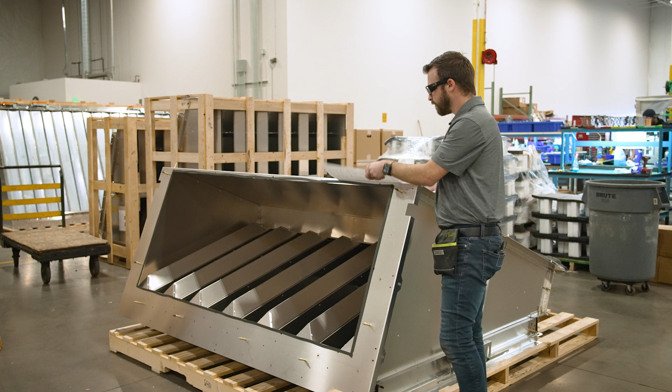With the channel blender, there will be a box of hardware, and in this box of hardware is a pair of cleco pliers, which are used to remove the temporary fasteners used for shipping. The cleco pliers and the clecos must be returned to Blender Products with the prepaid shipping label upon completion of the assembly. Additionally, there will be a build direction diagram and a list of the hardware that's packaged inside your hardware box.

The first step to assembling this channel blender, we need to remove the top template by removing the clecos around the channel blender and carry this template into the air handling unit and install it on the ceiling. Now that you have your top template into the air handling unit, we're going to lift it and screw it into the ceiling of your mixing box. We're going to only screw through the slotted holes.

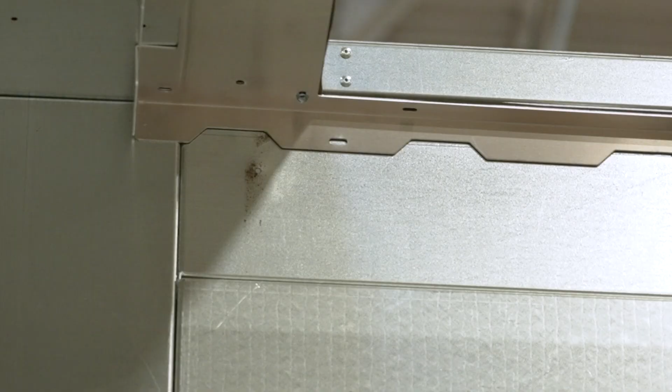Before you start screwing, you want to make sure that your opening is centered with the opening on your mixing box. Make sure that the pre-installed gasket tape is compressed between the air handling unit ceiling and the install template. So on the templates, the slotted holes are the only ones we're screwing in at this time. There are circular holes. We do not want to install screws in those holes at this time.

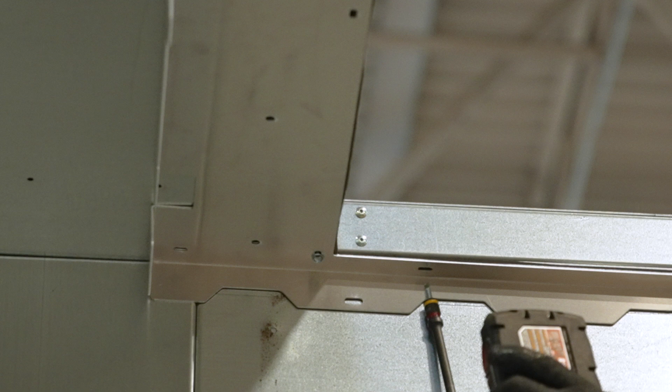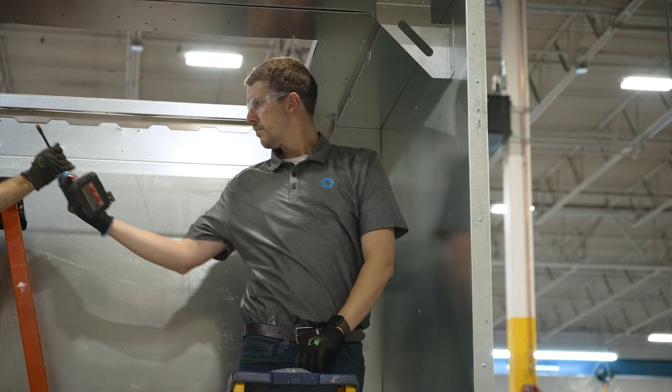Now that we have the top template installed, we're going to take the top back template and remove the cleco fasteners and install it in the air handling unit. If it is difficult to remove any parts on this pallet, double check that all clecos have been removed. When you lift this one up, you want to make sure that the alignment patterns align. And again, we're only going to screw in through the slotted holes.

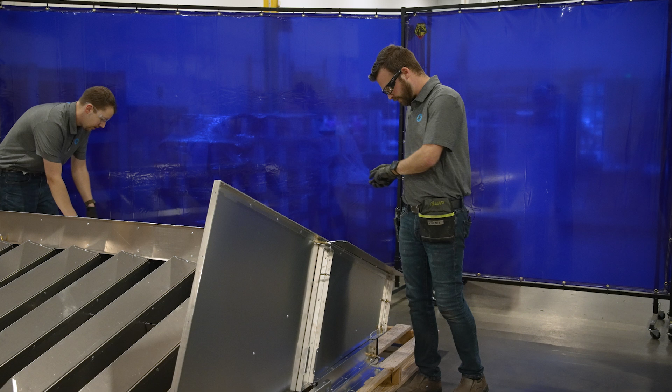Finally, the back bottom template will be removed from the channel blender. Again, we're going to align the alignment grids of these two panels before screwing the template in, and we're going to screw through only the slotted holes.

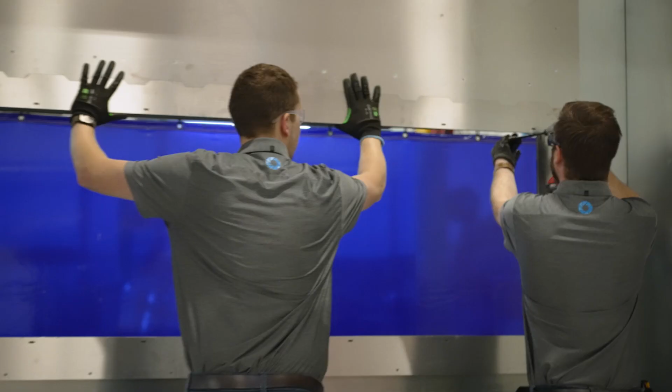Now that we have the templates up, we want to go through and make sure that all the slotted holes have screws in every piece of the template. If your template doesn't fit in your mixing box, please stop, because the channel blender cannot be assembled if the template doesn't fit.

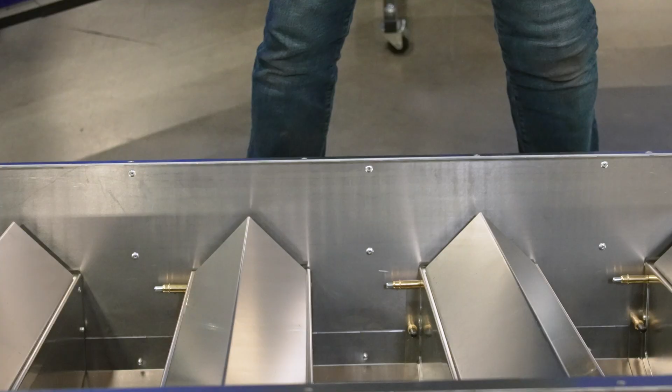So now we're going to remove this bottom cap and bring it into the air handling unit for installation. In order to remove it from the channel blender, there are temporary fasteners pointing along the channel walls into this bottom cap and a couple on the sides. Those will all need to be removed.

Before we can install this bottom cap to the air handling unit, we need to silicone this back flange. Every component that gets attached directly to the template will have silicone on the flange to make an airtight seal. Now we'll take this bottom panel and we'll align it with the holes at the bottom of the template and screw it in.

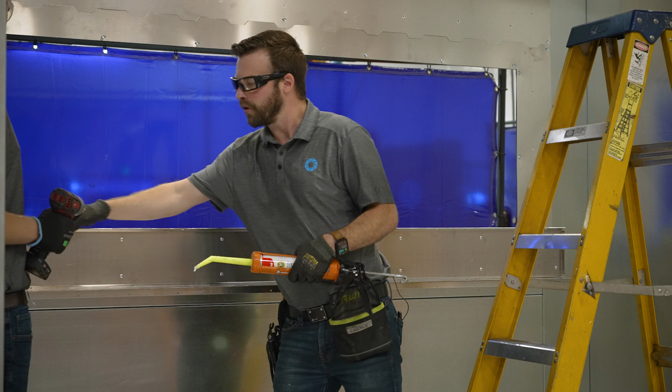So now we'll take the channel divider, remove the clecos securing the channel divider to the channel blender, and install it to the air handling unit just like that bottom cap. So before we can install this channel divider to the wall, again, we're going to need to silicone this flange, and it's key to point out that there are two flanges. The flange with the sealing tape points away from the wall.

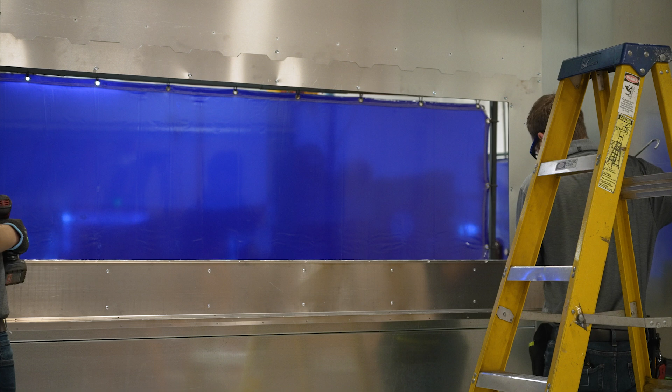Now we'll remove this top cap and install it on the air handling unit. Now we're going to install this top cap to the ceiling of the mixing box. But first we need to apply a bead of silicone along this front edge. When you lift this up here, this flange will be pointing down. And we're going to line the square holes with the holes on the template and screw only through the square holes.

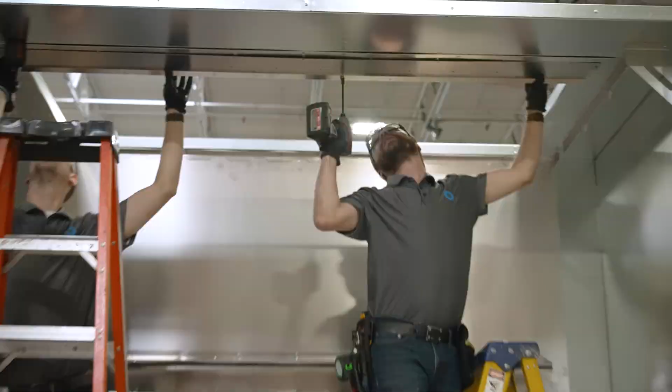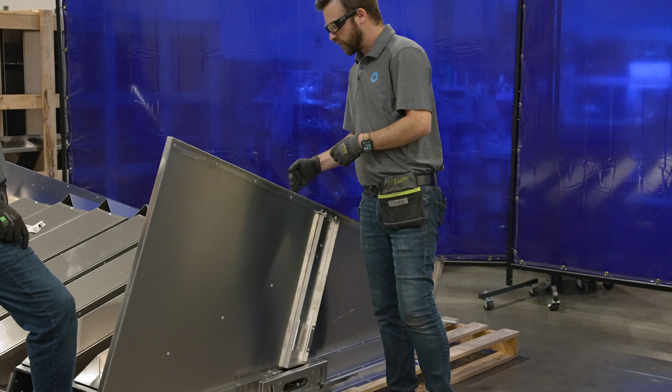The channel blender was pre-assembled with an assembly direction in mind. So when you start to assemble the channel blender inside your mixing box, you'll work your way away from the door, and as assembly progresses, you'll work your way towards the access door. The first channel wall has a lead-in riveted to the end wall. Additionally, each channel is numbered sequentially, 1, 2, 3, and so on.

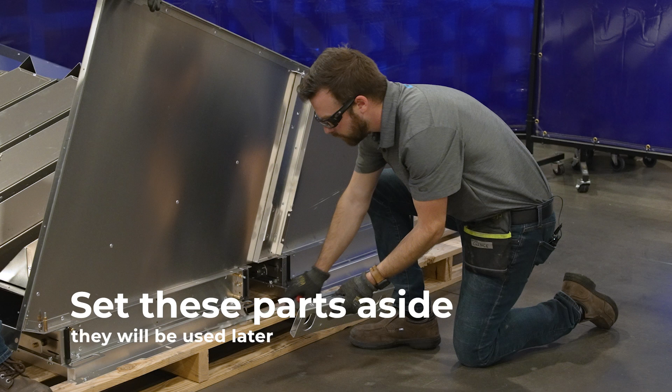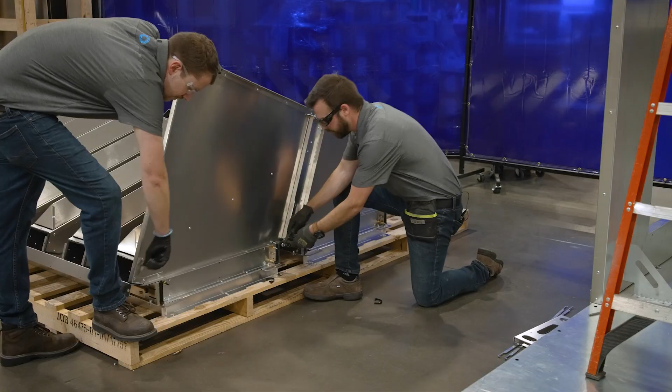First, we're going to want to take these brackets off and set them aside. And remove the clecos from this damper frame piece and the side pieces, and lift this end wall up. Before you install your first end wall, marked number 1, to the mixing box, we need to silicone this flange, and this bottom plate right here. Additionally, we'll silicone this channel divider flange right here.

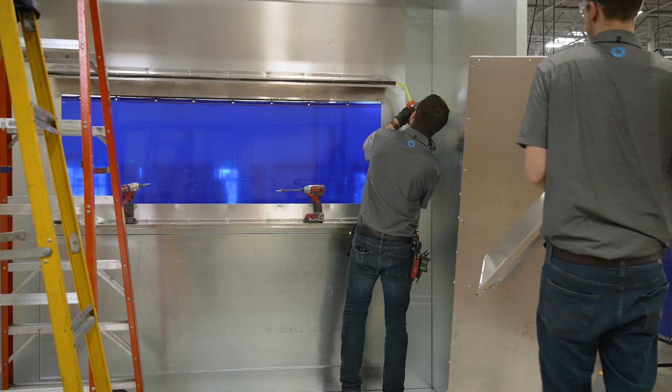We'll take this end wall and we'll lift it up, aligning the holes, and start screwing it in. It's recommended to screw in the top corner first and then work your way out on those flanges.

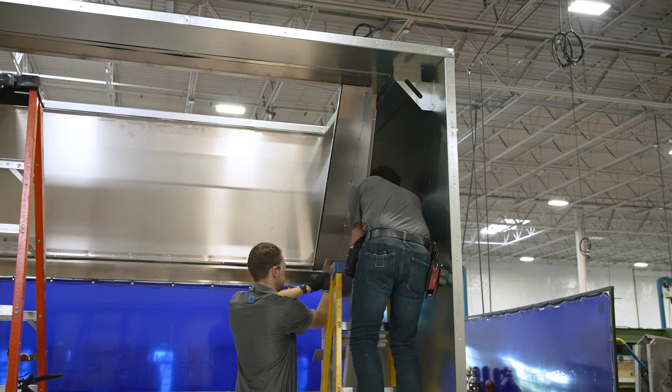So now we're gonna rivet this channel divider to the end wall. On this back flange here, there's a few rivets that need to be hit this way. They can be difficult to see, but because we have light shining in here, we can line them up. If you're having difficulty hitting those rivets from the side of the channel divider, you can also grab a ladder and shoot them from the inside out.

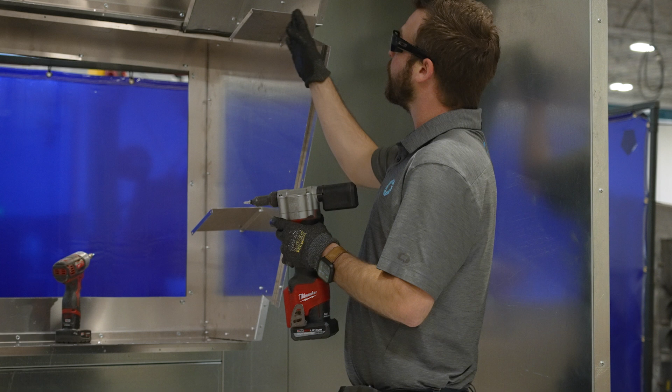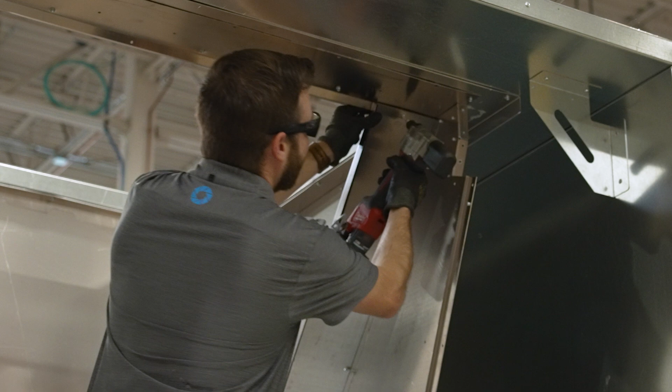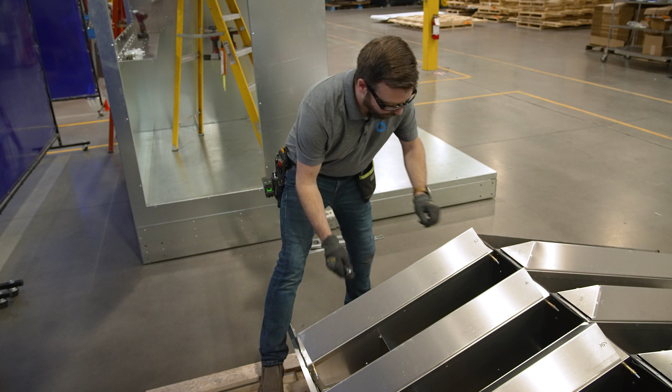So as we're walking through installing these channel walls, be careful of all these sharp corners because they can cut you. It's sheet metal. We're going to want to rivet on this one, this lead-in to the channel divider. And we'll need to rivet the lead-in right here. So now, for the following channel walls, we'll need to remove clecos from the ends of the lead-ins, and then we can lift the channel walls up.

Before you put your channel walls on, you want to inspect the tape around the seams. This tape is not placed properly. Sometimes that happens during shipping. You can peel it and re-stick it so it covers the split channel wall. If the tape is damaged or missing, we do supply a roll of black foam tape in your hardware kit that you can replace the tape with. The tape is on the top and the bottom of the channel walls.

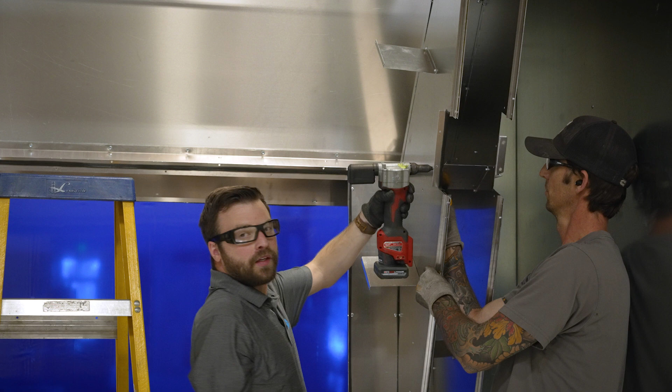So now we can install the channel wall in the lead-in assembly. So we're gonna lift it up into place. We're gonna rock it in. And this part's pretty crucial: the channel wall here needs to sit firmly up against the sealing tape on this back lead-in before you start riveting it. We'll also hit your turning vanes. Make sure they're lined up. Sometimes you need to look over to ensure that the rivet is through the channel wall and through the turning vane.

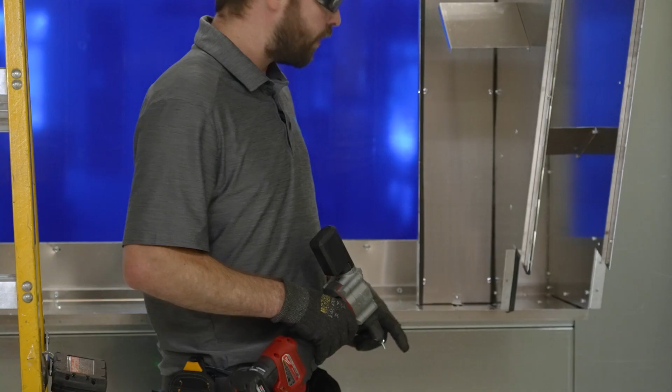We will need to use a Tek screw to screw in this flange to this top panel. The hole in this flange should align with the hole on the top panel and the template. We also need to rivet this bottom flange and this back tab to the bottom cap.

So now we're just going to continue taking the channel walls off of the shipping assembly in sequential order, 2, 3, 4, 5, and down the line until you're completed. And just rinse and repeat. Rock the panel up there, hit your rivets. Be sure to get your lead-ins, your turning vanes, the brackets on the bottom and the top.

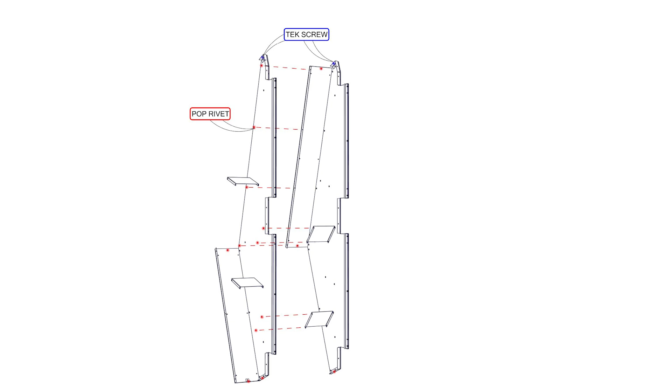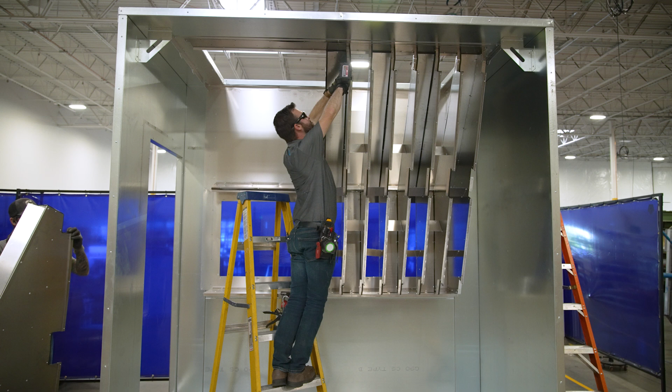It is crucial that every rivet is installed before moving onto the next channel wall because the space between the channels is too close together to be able to install rivets after the fact. If any rivets are missed, you can try to use a hand rivet tool to install the missing rivets, or you can work backwards, removing the obstructing channel walls until you have access to install the missing rivets.

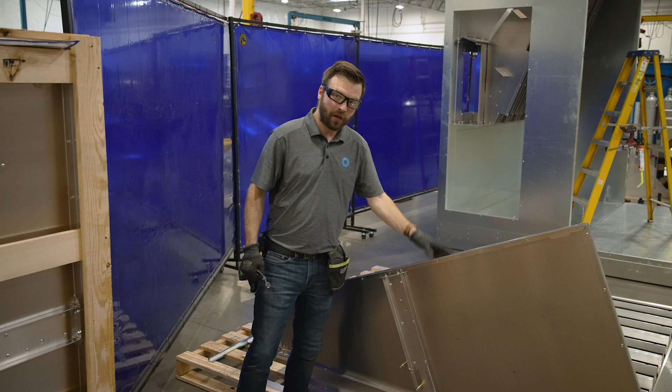To get the last channel wall off, you'll need to remove clecos from the end plate. And if there's any on the damper frame, there as well. Now you can remove the end wall, and now you have access to your last channel wall for assembly inside the mixing box.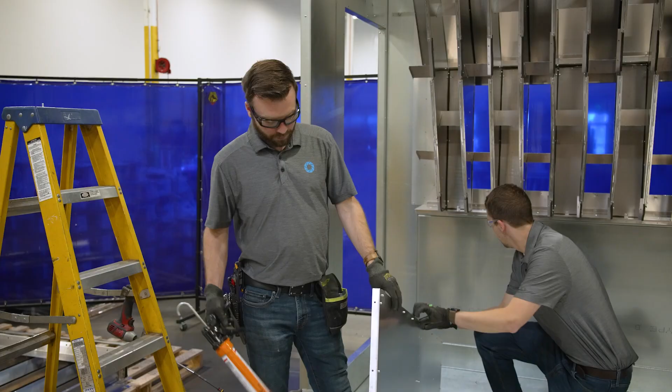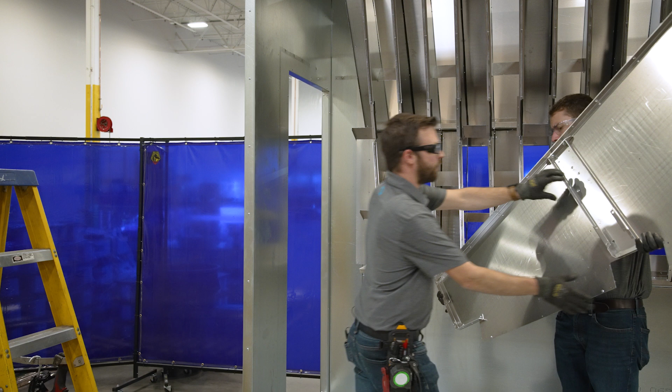For the end wall here, we're going to want to silicone the top and back flanges. We also want to silicone this flange right here where that end wall is going to mate up. Then we can lift the end wall up to the channel divider. We're also going to want to silicone the channel divider back here as well. Now we can lift it up into place, and we can rivet the turning vanes and the lead-ins.

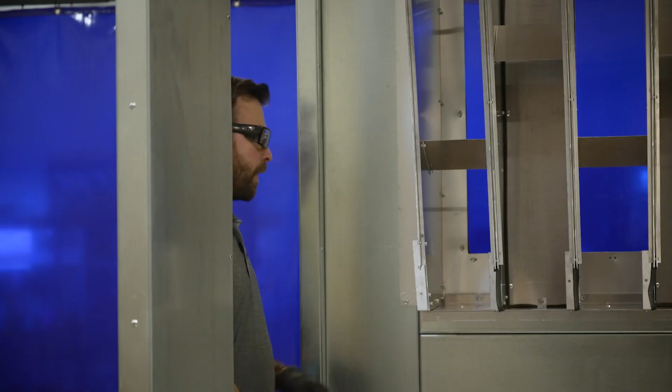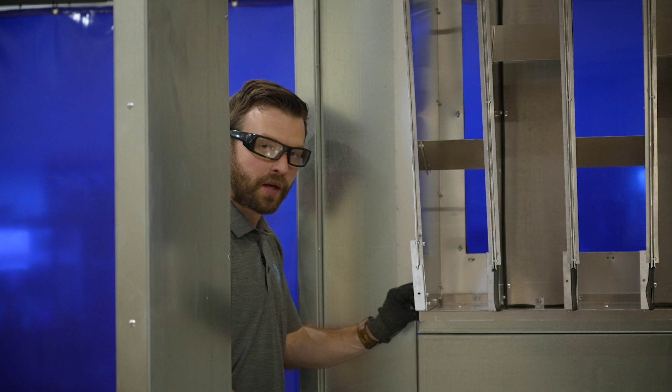Now that we have the channel walls assembly built and both end plates on, we're going to want to rivet the two holes in the back of this bottom flange on both sides. So now we're going to use Tek screws to screw this flange on the back and top into the air handling unit. Just as we did with the first side, it's best to start in the top corner and work your way out.

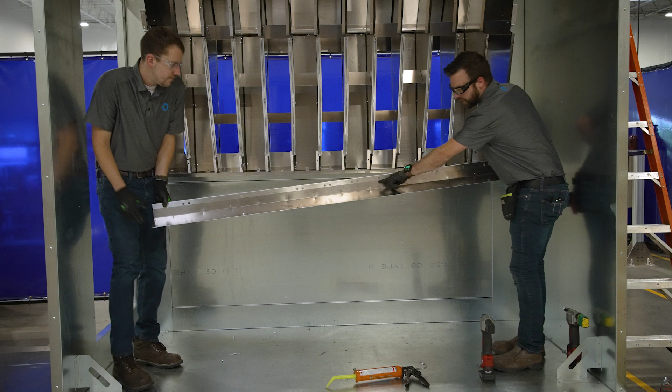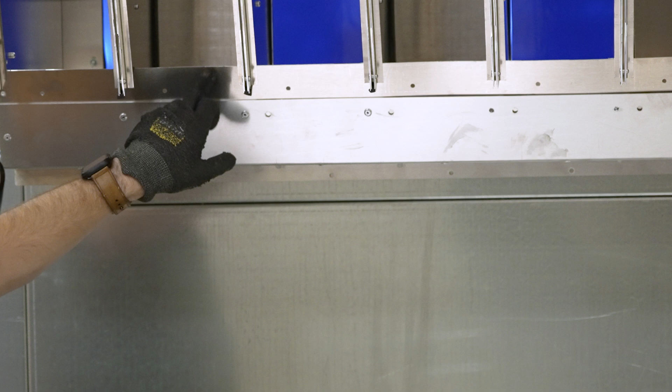So now we'll take the front piece of the bottom cap into the AHU, and we want to be sure to silicone along this seam right here where the two pieces of metal connect. When you're riveting this front cap on, you want to hit the holes that are right in this 080 piece of metal right here along the way, as well as the holes in this back flange right here. Do not hit the holes closest to the channel divider where the dampers will go. So now that you have all the rivets on this bottom flange in the front hit, you can hit this last rivet that's right here.

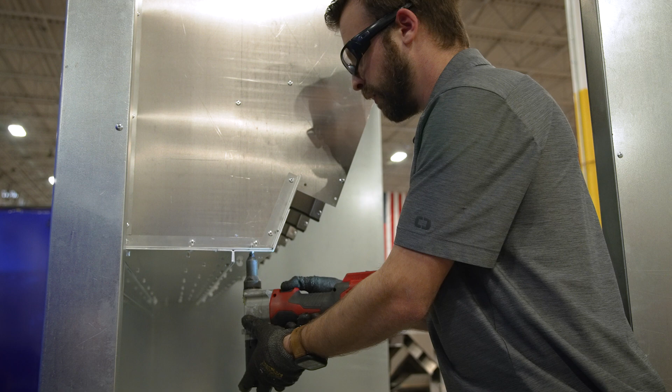On a double bank unit, we need to install this gray gasket tape on these two edges here on every single channel wall. We don't install it during shipping because it's likely to get damaged. So at this time, inspect all the sealing tape on this front face as well. If some of it's damaged, you can either replace it with the gasket tape provided or just peel it and re-stick it.

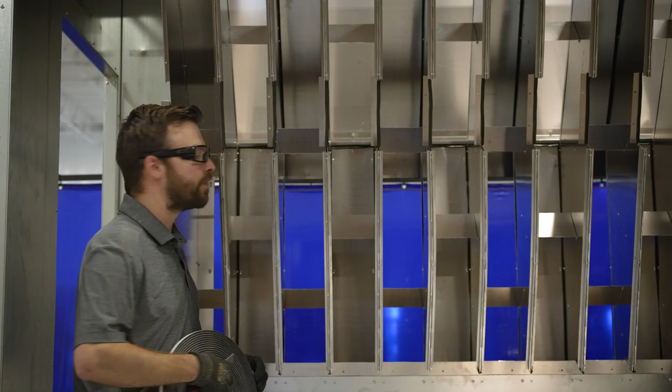So now we'll put the middle plate up here in between the two damper banks. This part is not symmetrical, so if you go to line it up, you want to line it up with these holes and these holes here. If they don't quite line up, you can flip the thing 180 and it will fit just fine. What we want to do is we want to silicone this flange and that flange over there. And when we install this into here, it goes on the inside of the end plates.

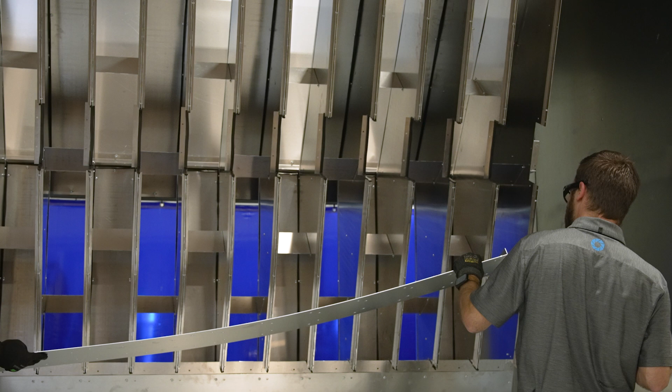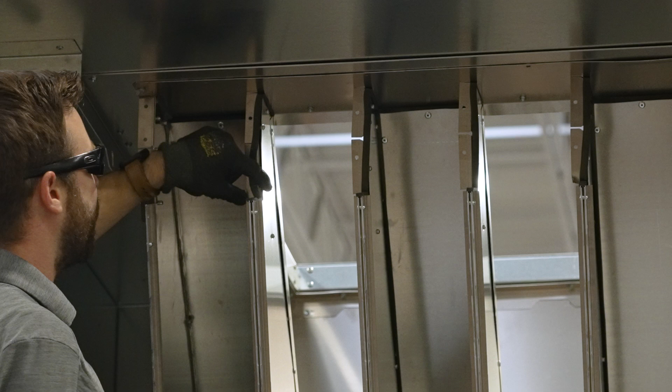To connect the middle plate to the side, there's two rivets right here in the center of this. Before we put this top panel on, we want to go through and inspect all the tape. So as you can see, this piece of tape right here is not covering the channel wall split. So what we need to do is we need to try and peel it off. And if you can't peel it off, we can scrape it off and apply a new piece of tape right here.

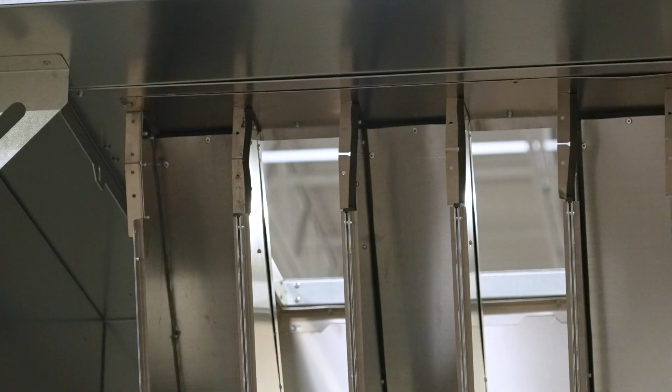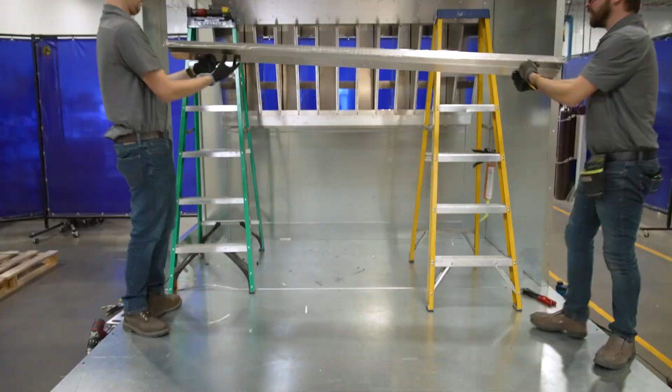So now to install this front piece of the top cap, we need to silicone the two ends and this top flange. There are a couple larger holes on the two ends, and those two holes are clearance holes that will pop over the Tek screws that we installed with the template.

So as we're going through and riveting this together, we want to hit this line of holes. We will Tek screw this top flange into the mixing box. We'll also hit this line of holes here, the first one over this bend. We do not want to hit any of the holes closest to where the damper frame is going to go, including the one on the very end.

We need to add silicone where the damper frame is going to contact the plate on the top, in the middle, before we install the damper frame. So that's probably about ½ an inch away from this edge is where we want to apply our bead of silicone all the way down.

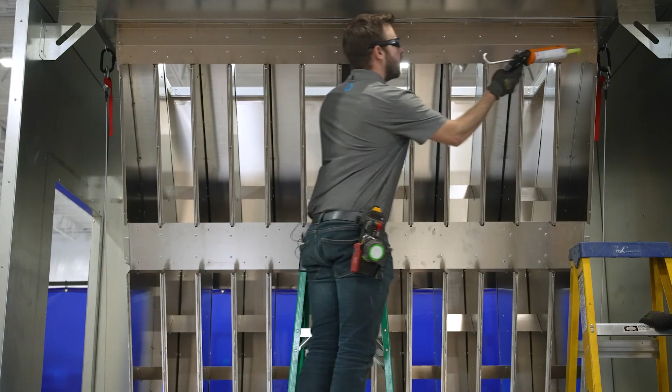So now we'll take the damper frame off of the shipping pallet. In order to do so, there's a drive screw right here, and on both sides there'll be a couple. We need to remove those. This bracket on the bottom that goes along the perimeter of this does get removed. Those are just for shipping. Those can be discarded once you're done.

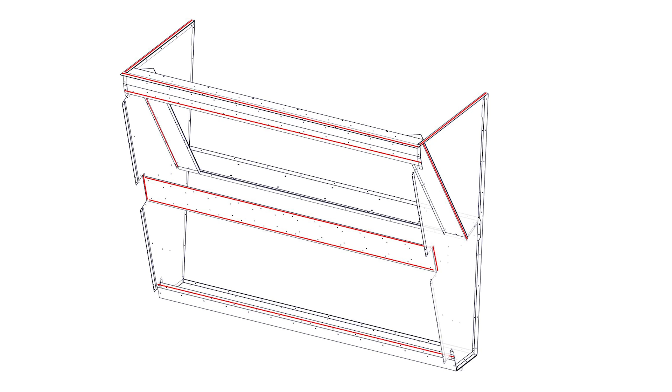So now that we're going to install the bottom damper frame, again, we have the silicone along this slant right here, and same right here. We want to keep the silicone about ½ an inch away from this edge. We're going to bring in this damper frame. The help of a third person may be beneficial at this point. You want to kind of slide it in there, making sure to align the channels with the split and the finger seal.

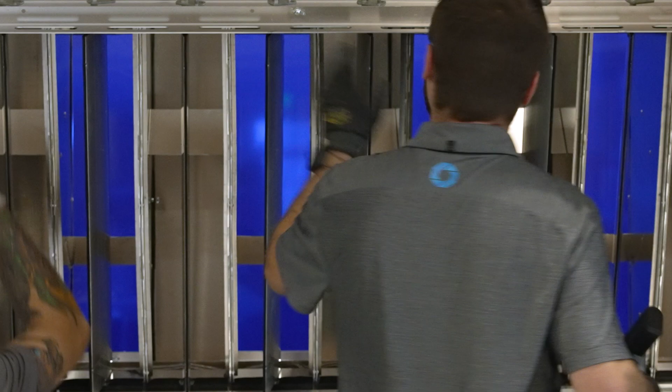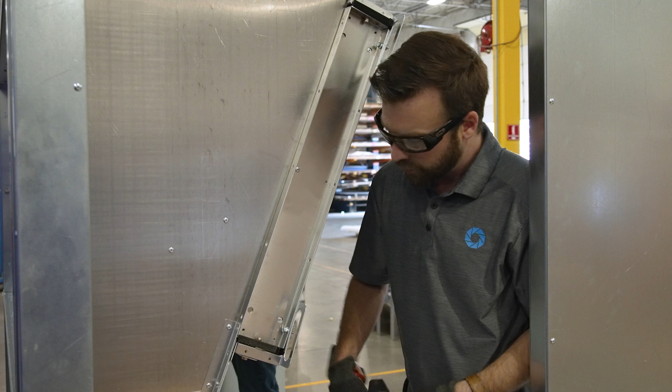And once you do have it in place, we can hit the rivets on the side of this damper frame. So we want to point out the rivets on the side of the damper frame that you need to hit in order to keep the damper frame secured to the channel blender. So there's 2 lines of them. On this particular blender, there is a total of 6, but depending on the size of your channel blender and the size of the damper frame, there may be more.

When you put these in there, you want to make sure that the channel wall, the end wall, doesn't get pushed back with the rivet. So having your hand on the inside to keep some pressure helps ensure that the rivet goes through both pieces of metal.

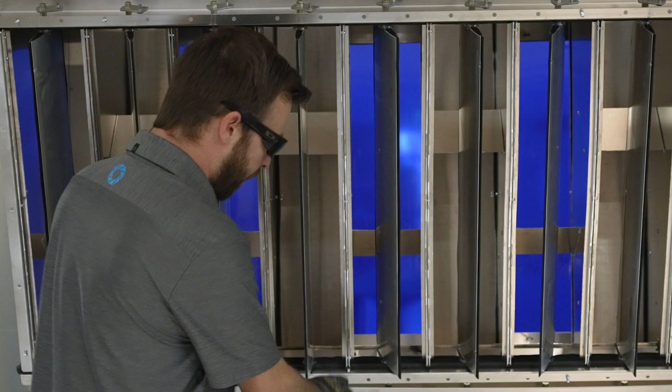We want to make sure that there are 4 fingers of the finger seal on front of this damper stop and 4 behind on both sides, the bottom and the top. Additionally, we want to make sure that the finger seal does not protrude past into this channel wall area. So you may need to wiggle it back and pull the finger seal over in order to get proper alignment.

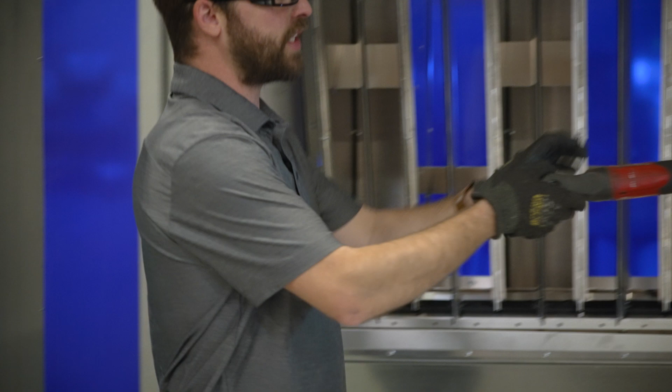So now we need to compress the top and bottom damper frames onto the damper assembly. First, we're going to loosen up the spacers and take out the spacers on both sides. And then we can snug them back down, not tight. We'll come back and tighten them at the end.

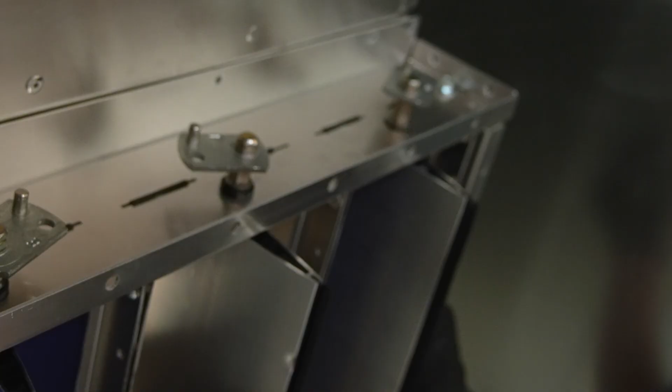During this process, there's an opportunity for the bearings and the bushings to come out of the top or bottom damper frame. So when you're going to snug it back together, you just kind of want to make sure that everything's going smoothly. And sometimes you might have to wiggle them back and forth in order to get them back into place. Here's a good example of a bearing that's seated properly and then one that's not. So if we went to tighten this down right here, it would end up cracking and crushing this bearing and bushing. And if the bearing or the bushing gets broken, it can be very difficult to replace.

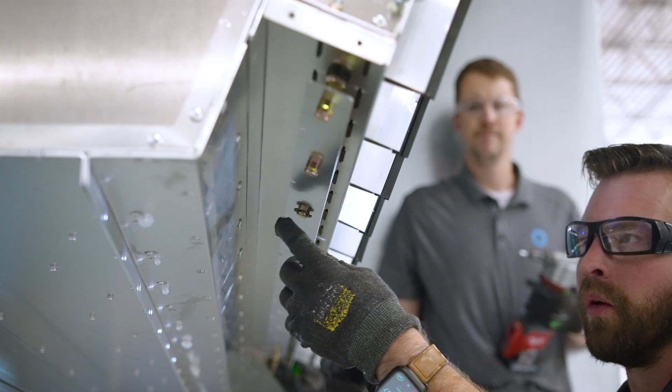We'll need to take this anti-rotation bracket off in order to get some of the rivets here and on the top side, because we'll need to move the blades. So in order to do so, we'll take the C-clips off that hold it on, and we can take this off, and this can be discarded.

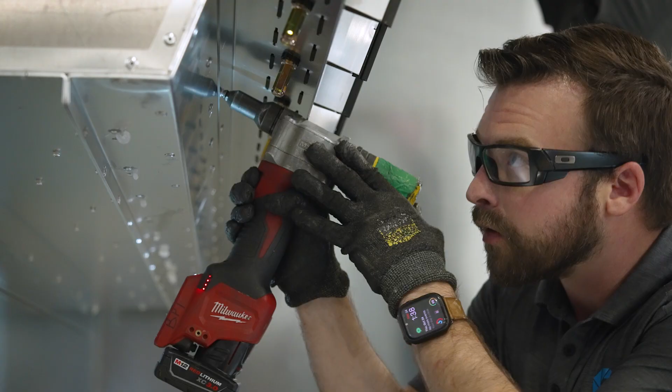On each damper frame, there's a set of rivets that connect the top to the sides on the top and the bottom. So now we need to go through each one and get those. If the holes aren't quite lined up, you may need to loosen this nut a little bit, the bolt, and then hit your rivets and then retighten the bolt.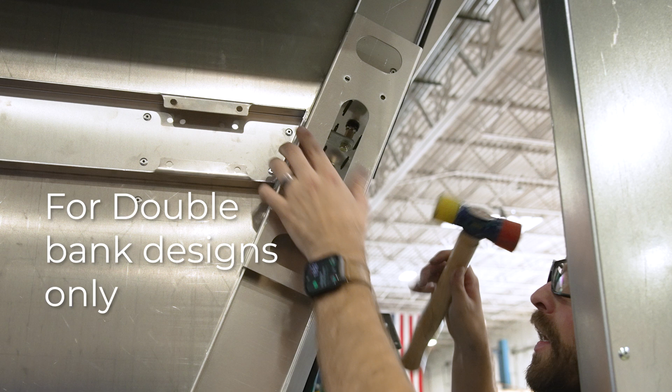So to install the side brackets that link the top and bottom damper frames together, this is a structural component. So it may be a little snug, but it slides right in here. You just want to line the holes up with the damper frames and this bracket back here. You may need to give it a little bit of a tap. Then you can insert your bolts and your nuts. Now you can tighten all these bolts and nuts.

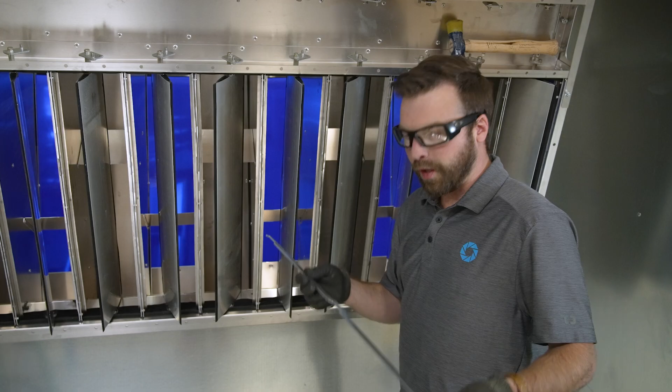If your channel blender came with damper frame stiffener brackets, which look like this, we're going to install those now. Your channel blender may have come with two. If it's a double bank channel blender that comes with two of these, please install one per damper bank. If it comes with four, please install two per damper bank. Additionally, your channel blender may not have come with any of these, which means it's not needed and you may skip this step.

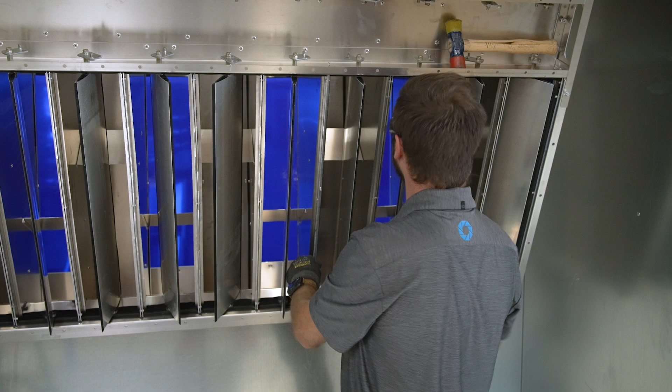So to install these, we have this little cutout here, which is designed to slide around the rivet. So you're gonna look through your damper bank, the top, and you're gonna find a little cutout with a hole right here, and that is where this stiffener is gonna be inserted. So how we're gonna insert that is we wedge it in between the channel wall here, and we get it up. We just sort of rock it in between the two pieces of the channel wall here, and press it in. A hammer may be useful in order to get it all the way in there.

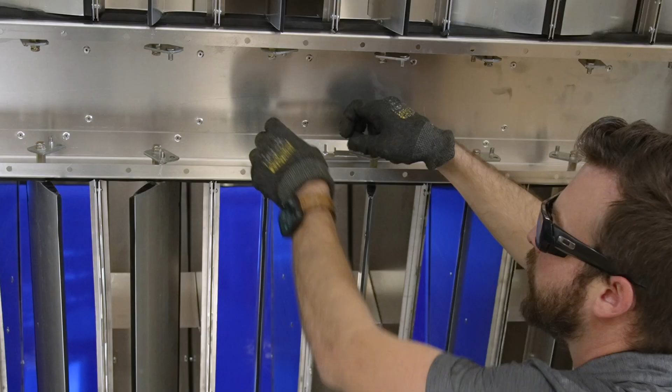Now we're going to take our brackets that get riveted to the channel blender damper frame. We're going to have one on the top and one on the bottom so that the rivet holes are facing outward. Slide it on there. We can rivet this one on. Now we can use our hammer to tap it down until it's seated against that piece we just hit.

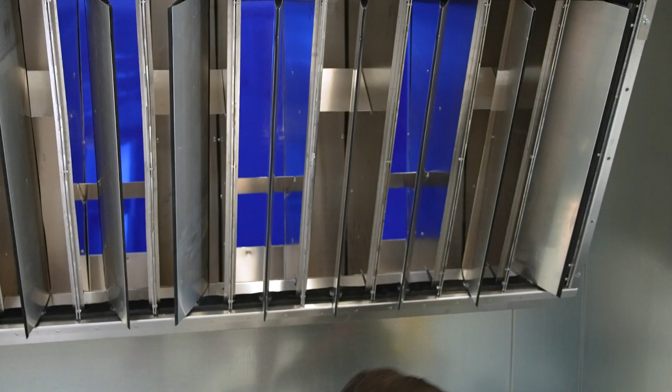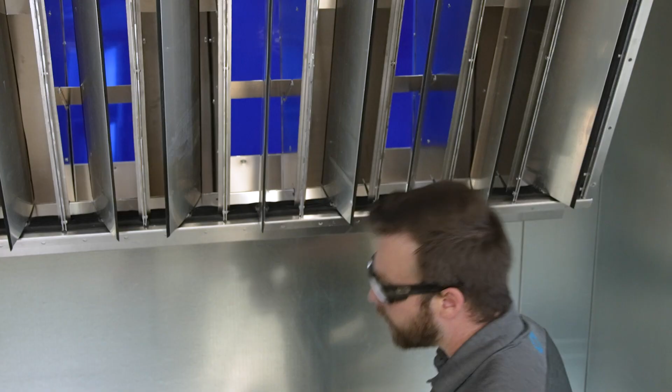Go to the bottom and slide on the bracket just like we did the top to captivate this stiffener. The little hook on the bottom of this stiffening bracket should hook onto the aluminum bracket we just installed in order to keep it all in place.

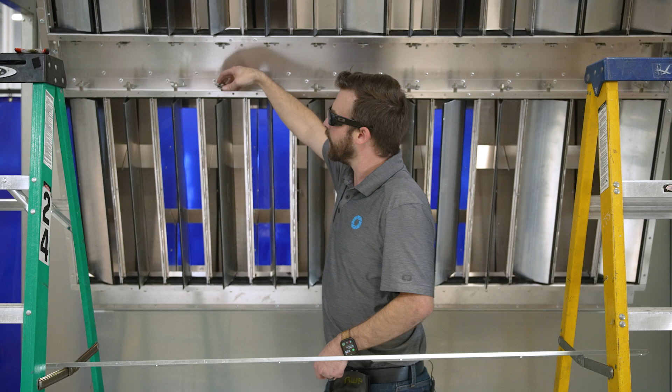So now we're going to install the linkage bars. This one operates the outside air channels on the bottom bank. So we're going to install it on these damper shafts. You'll notice that there is something called an over travel stop on some of these damper linkages. And this is to keep the blade from moving more than 90 degrees. So these are usually on the third and fourth dampers in from the side. There should be one per linkage bar.

When we're putting our bushings in the linkage bar down here, we want to insert them from the backside in. For the one that is going to be with the over travel stop, we'll need to cut it a little bit to make room for that over travel stop. So we're just going to cut the material thickness of the over travel stop out of this bushing. You can use a razor blade or dikes to cut this, or a little rotary tool. If you do not cut it, then the linkage bar will not sit flat and the dampers may not actuate as designed.

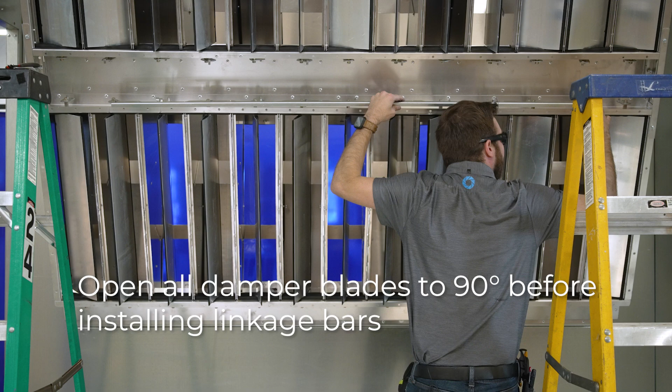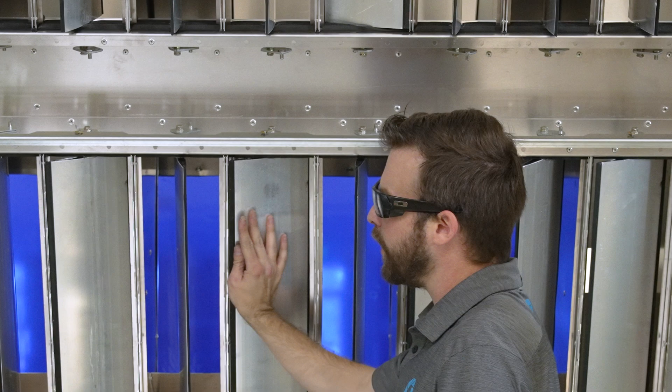Now we'll take this linkage bar, we're going to slide it onto these damper shafts. Now we'll take our bag of C-clips and we're going to stick them on each of those linkage bars to keep the linkage bar, the bushings, and everything held in place. Now we can test that all the blades that the linkage bars are attached to move in unison. Looking good. Now we'll do the same thing with the linkage bar for the return air channels. Now we're going to repeat the same process for the linkage bars for the top bank.

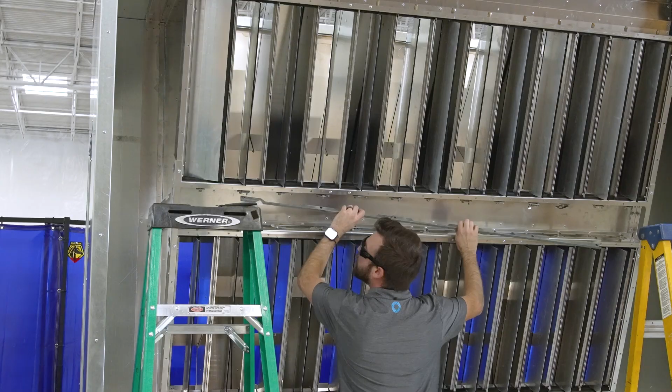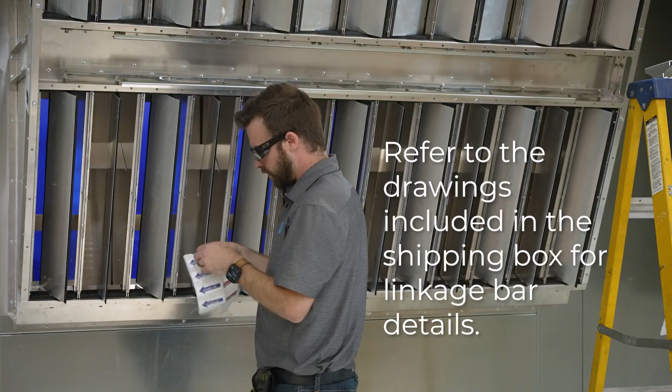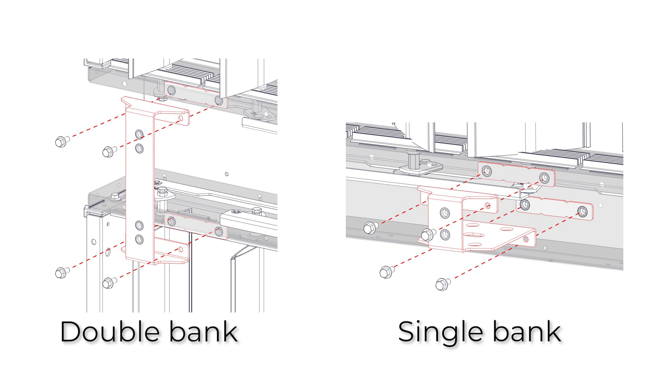All right, so now we're going to put our actuator brackets on this channel blender. So we're going to grab a backing plate and our back actuator bracket, the first one. We'll do this to both sides of this channel blender because it has 4 actuators. See our next video on how to install the actuators and clock the damper blades.

So now that we've completed assembling our channel blender, what we'll do is we'll take our Cleco pliers and our Clecos, throw them in the box, slap the prepaid shipping label on it, and ship it back to Blender Products.